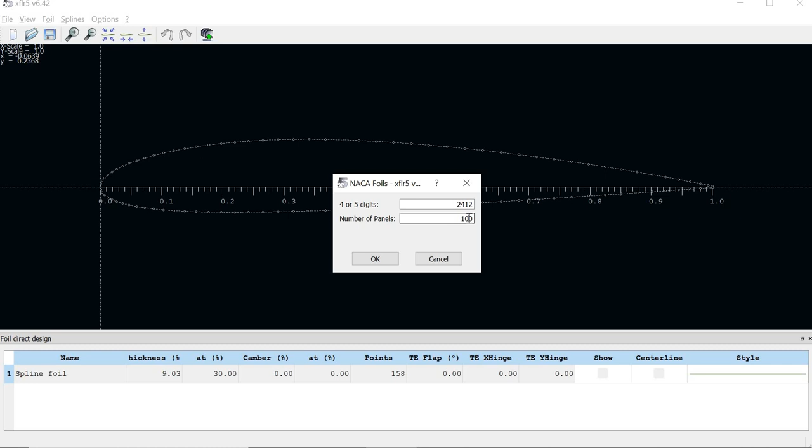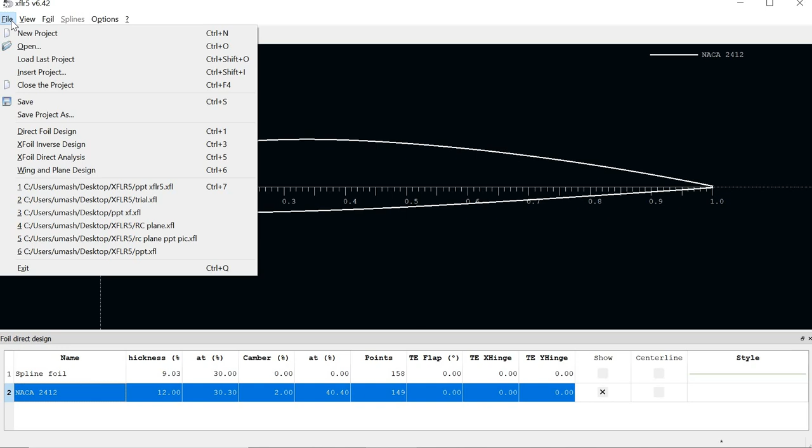So this is our airfoil. Here under style you can select points, style, width and color. Let us increase the width and change the color to white. Click on OK. So now let us do the analysis. File, XFoil Direct Analysis. So this is the graph.

Click on Analysis, Batch Analysis, Current foil only. Alpha minimum will be minus 10 degrees, maximum 20. Click on Analysis and wait. It's an iterative method which will be done for each and every Reynolds number.

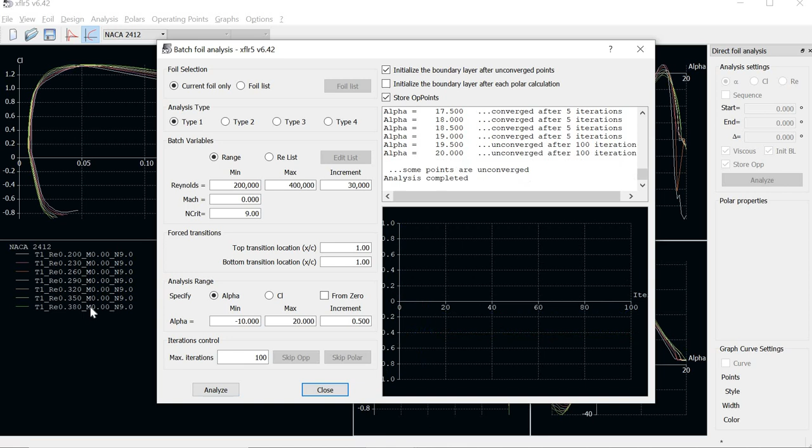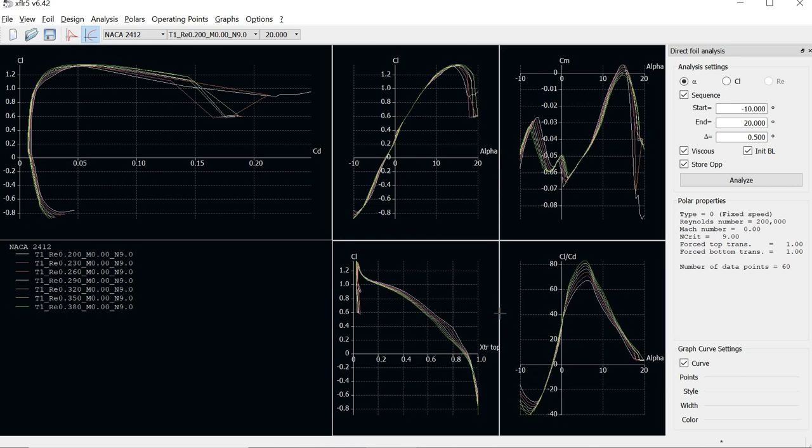Yes, and it's done. Close. So this is the graph that we will be getting. Now let us look into each and every graph. The first thing is CL versus CD graph.

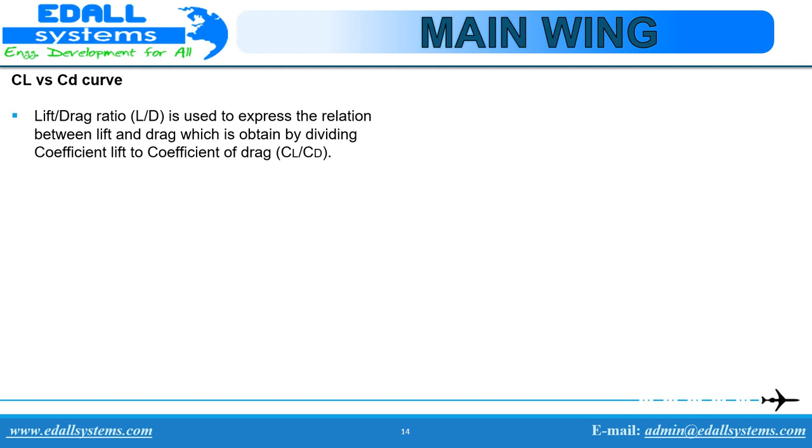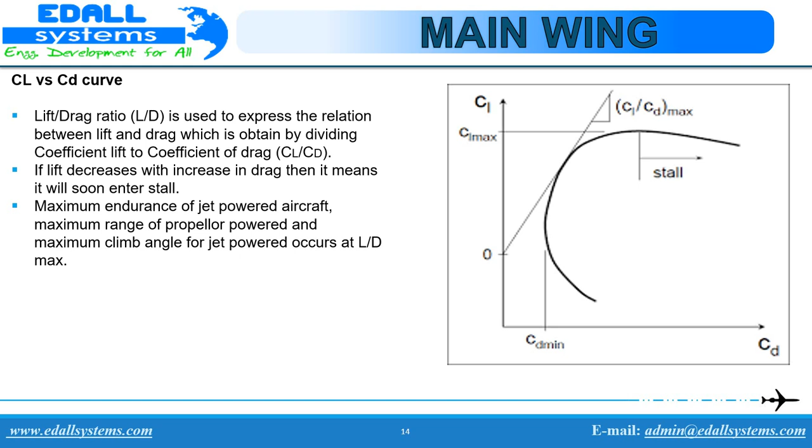The lift to drag ratio is used to express the relation between lift and drag and is determined by dividing the lift coefficient by the drag coefficient, that is CL by CD. If lift decreases with increase in drag, then it means that it will soon stall. Maximum endurance, maximum climb angle for jet powered and maximum range for propeller powered occurs at L by D max, that is lift to drag maximum.

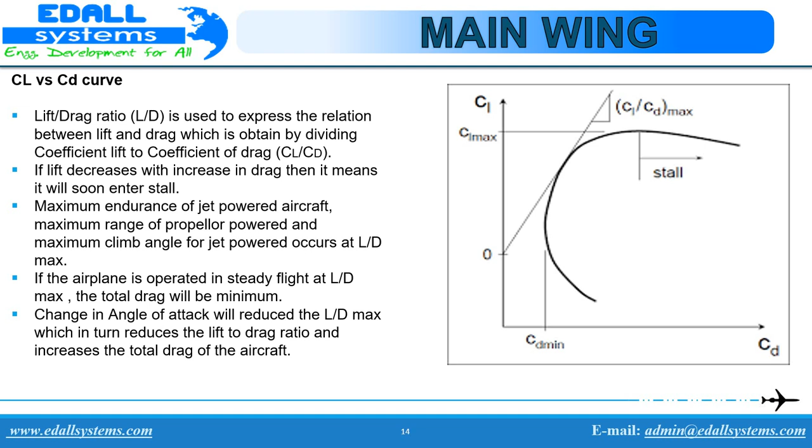If the airplane is operated in a steady flight at lift to drag maximum, the total drag will be minimum. The change in angle of attack will reduce the lift to drag maximum, which in turn reduces the lift to drag ratio and increases the total drag of the aircraft.

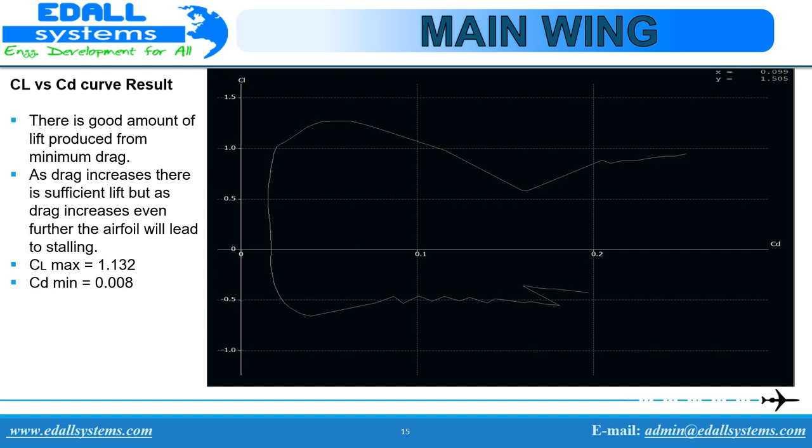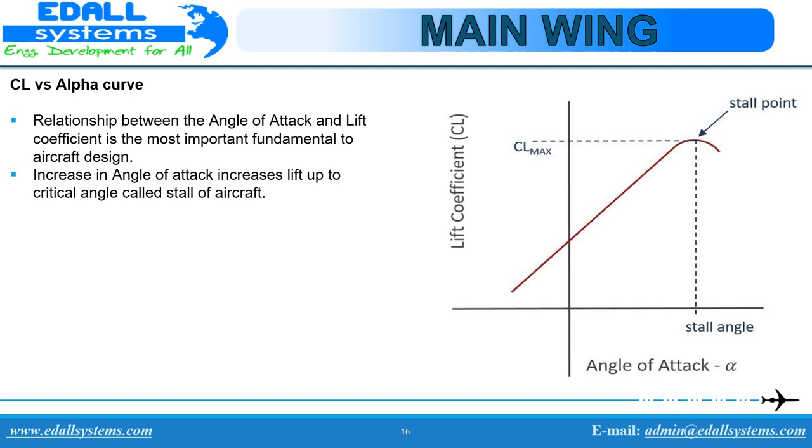The relation between the angle of attack and the lift coefficient is the most important fundamental to the aircraft design. Increase in angle of attack increases lift up to a critical angle called the stall of an aircraft. So here we have a normal flight and then the stall flight.

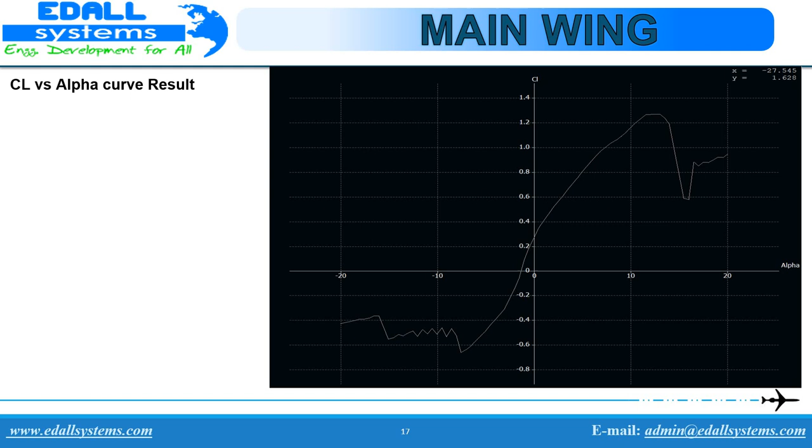The result that we have got for CL versus alpha is this, which shows there's a good amount of lift for less angle of attack. There is 0.34 amount of lift for 0 angle of attack. At 13 degree angle of attack, the lift produced is 1.34. At 15 degree angle of attack, the stall takes place.

So after stall, there's a slight increase in lift of the aircraft, which is caused due to the inclination effect of the aircraft, which is referred to as the fake lift, as once the aircraft is in complete stall, there is no lift or there is no true lift produced after that.

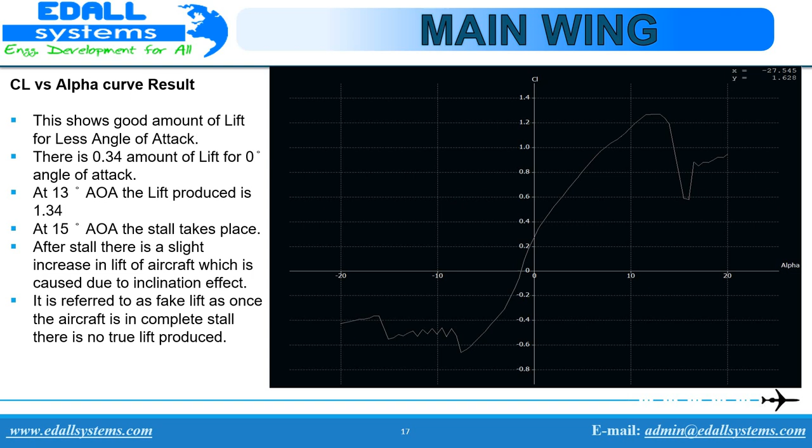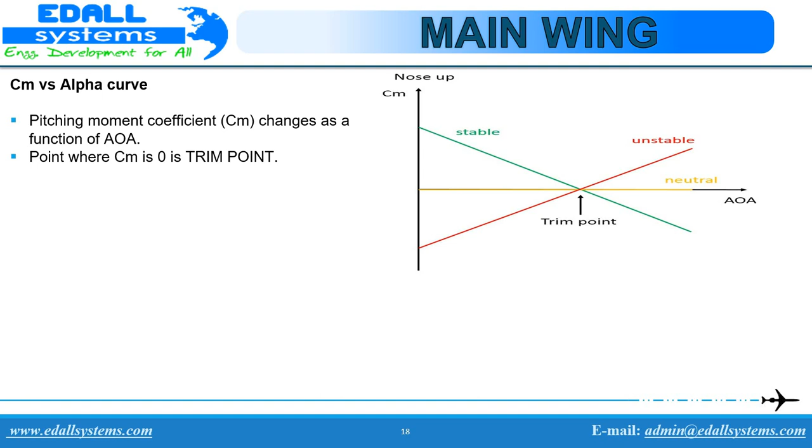Now we have the CM versus alpha curve. Pitching moment coefficient CM changes as a function of angle of attack. The point where CM is 0 is called the trim point. Pitching moment coefficient has to decrease in order to create a negative pitching moment. As long as the pitching moment coefficient slope is negative, the flight will be stable.

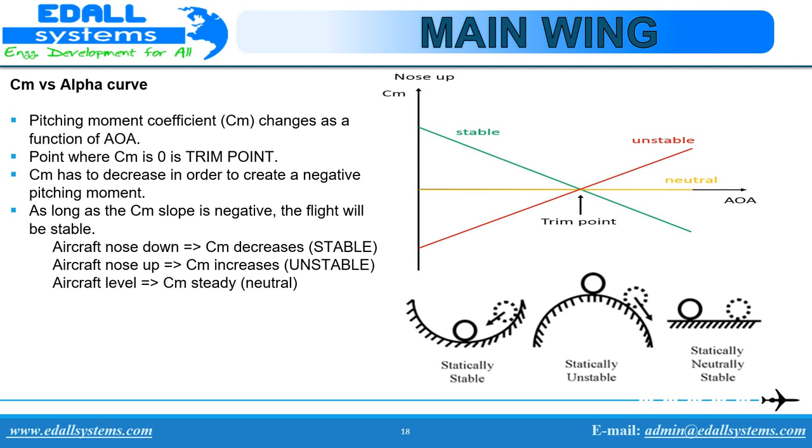So there are three types of stability, that is statically stable, statically unstable, and statically neutrally stable. If the aircraft nose is down, then the pitching moment coefficient decreases, that is called stable. If the aircraft nose is up, pitching moment coefficient increases, that is called unstable. And if the aircraft is level, then the pitching moment coefficient is neutral.

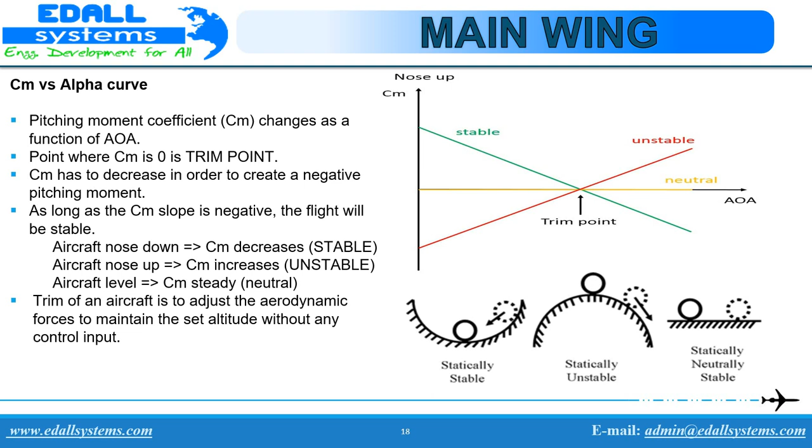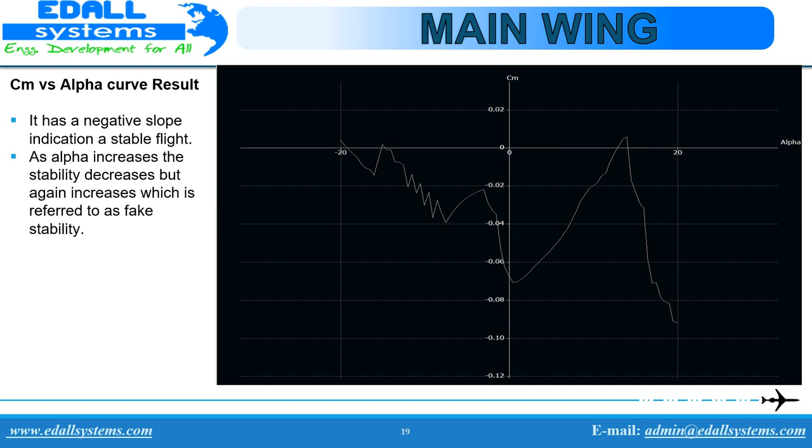Trim of an aircraft, when the pitching moment coefficient is 0, is to adjust the aerodynamic forces to maintain the set altitude without any control inputs. The CM versus alpha curve that we have got as a result is shown in the graph here. It has a negative slope, indicating a stable flight. As alpha increases, the stability also decreases but again increases later.

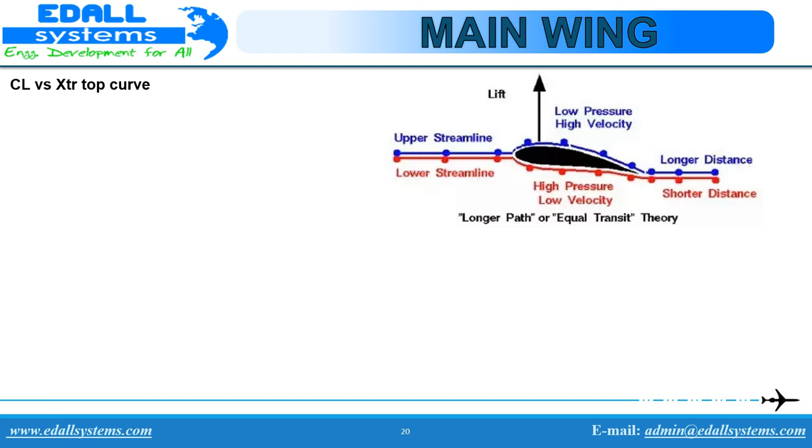Now we have the CL versus XTR top curve, the relationship between the coefficient of lift and the top surface of the airfoil. It indicates the lift coefficient obtained at different sections of the airfoil in the presence of skin friction drag. It describes how lift is distributed on the top surface of the airfoil at different sections of the wing.

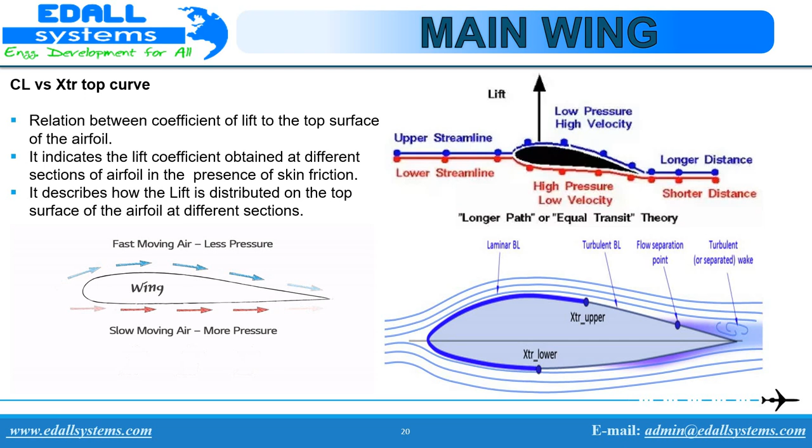The result that we have got for CL versus the top surface of the airfoil is shown in the graph here. The relationship of the coefficient of lift to the top surface of the airfoil indicates the lift coefficient obtained at different sections of the airfoil in the presence of skin friction drag.

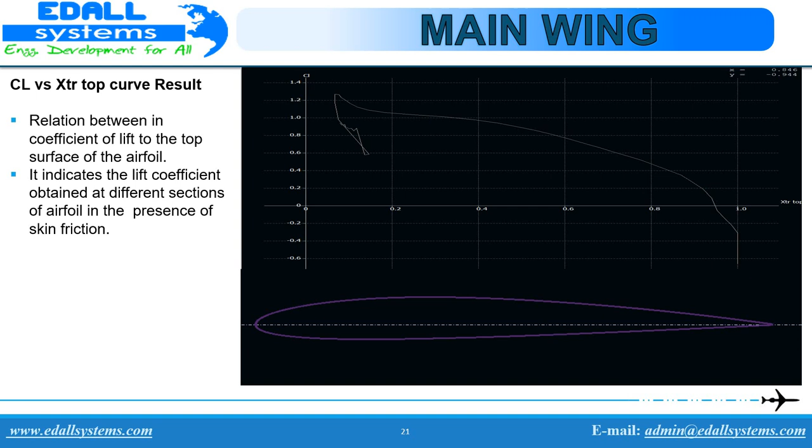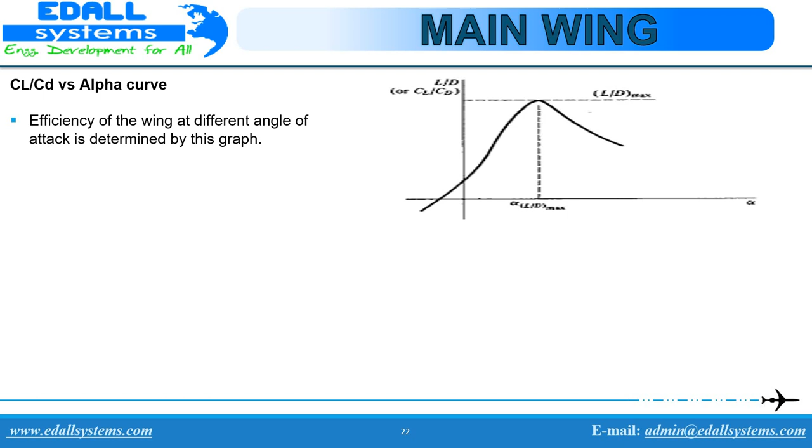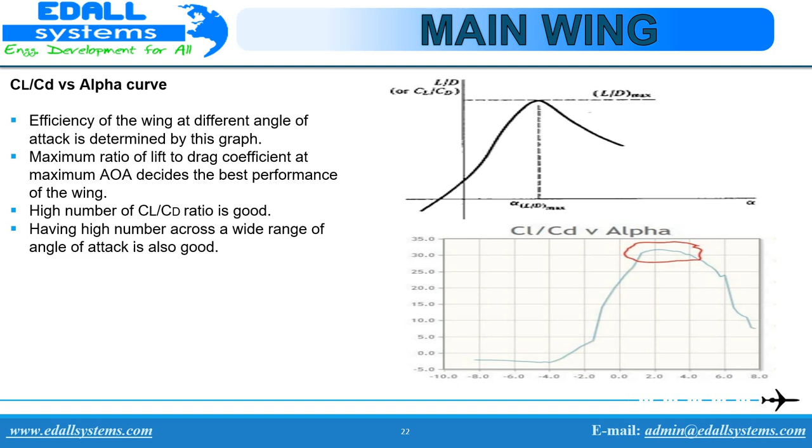Now we have the CL/CD versus alpha. The efficiency of the wing at different angles of attack is determined by this graph. Maximum ratio of lift to drag coefficient at maximum angle of attack decides the best performance of the wing. A high CL/CD ratio is good. Having a high number across a wide range of angles of attack is also good.

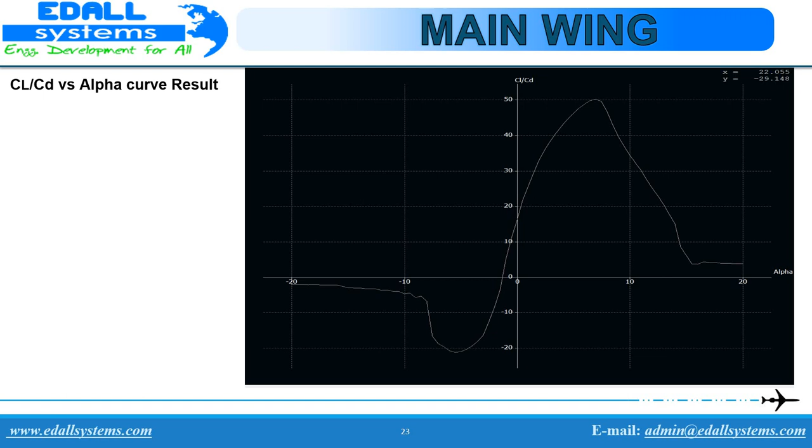So the CL/CD versus alpha curve that we have got is shown in the graph here. The peak performance occurs from 5 degree to 8 degree angle of attack. So if we are flying an aircraft with an angle of attack greater than 8 degrees, then it will be inefficient. The rate is declining from 7 degree angle of attack, which means the wing will stall and the aircraft will eventually crash.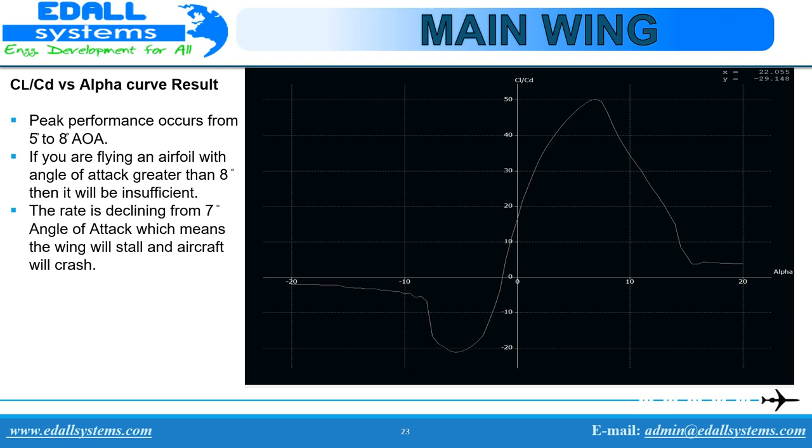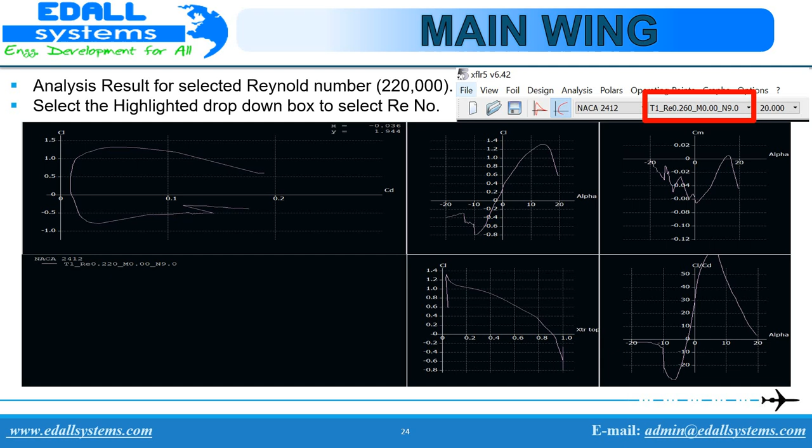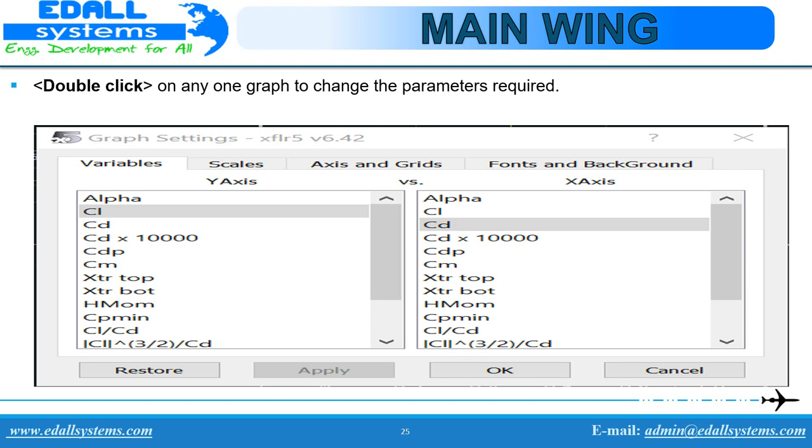Analysis result for selected Reynolds number. Select the highlighted box on the top right corner shown. When we select the different Reynolds number, we will get the graphs for a particular Reynolds number. By double-clicking on the graph, we can change its parameters to whatever variables we want on the X and Y axis. And then click on OK.

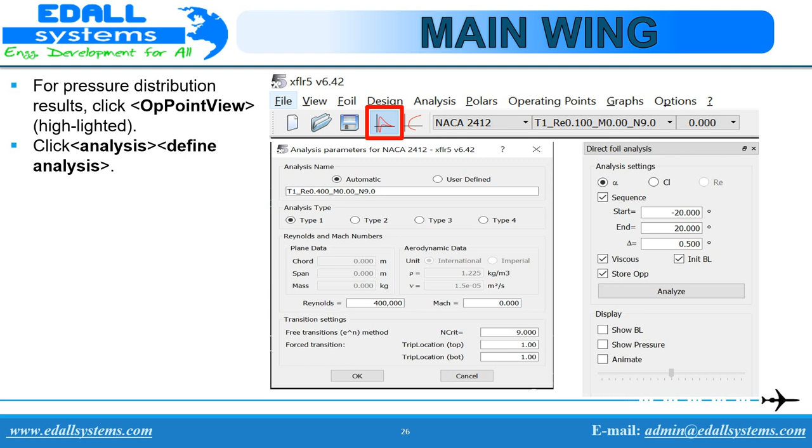For pressure distribution result, click on the OpPoint view highlighted on the right image. We will get the direct foil analysis. Click Analysis, Define Analysis, where we have Analysis Type 1, Reynolds number 400,000. Click OK. On the right side, select the angle of attack and select Analyze. The pressure distribution result for 0 angle of attack.

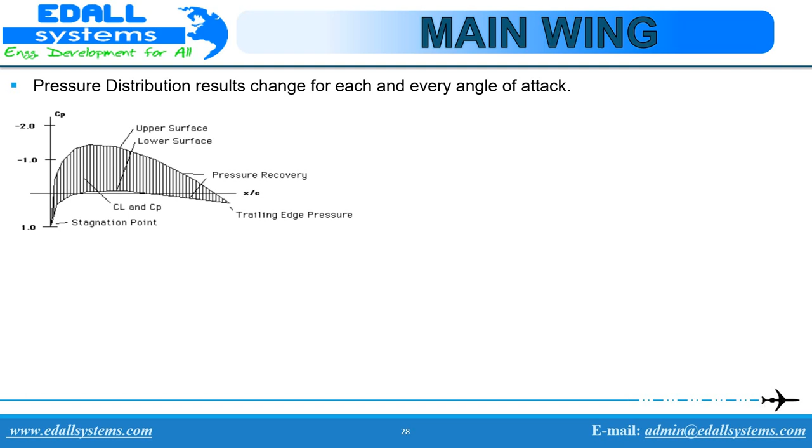By clicking on the highlighted drop-down box, the pressure distribution can be seen for different angles of attack. Pressure distribution results change for each and every angle of attack. As the airflow velocity increases along the surface of the wing, the pressure along the surface of the wing decreases.

Similarly, an increase in angle of attack will increase the separation between the airfoil's upper and lower sections' coefficient of pressure. In the same way that an aeroplane gets more lift as it increases its angle of attack, the NACA 2412 airfoil receives drastically more pressure loss as the angle of attack increases, producing a strong lifting force.

So the pressure differential created between the upper and the lower surface of the wing lifts the wing upward in the direction of lowered pressure. This lifting force is known as the induced lift. Let us see how to read the pressure distribution curve. The upper surface has a lower pressure, plotted higher as usual, than the lower surface.

The lower surface sometimes carries a positive pressure, but at many design conditions is usually pulling the wing downward. In this case, some suction that causes a negative coefficient of pressure, a downward force on the lower surface, is present near the midchord.

Pressure recovery is a region of the pressure distribution where the pressure increases from its minimum value to a value at the trailing edge. This area is also known as the region of adverse pressure gradient. As discussed in the other sessions, the adverse pressure gradient is associated with boundary layer transition and possibly separation if the gradient is too severe.

The trailing edge pressure is related to the airfoil thickness and the shape near the trailing edge. For thick airfoils, the pressure here is slightly positive. The velocity is a bit less than the free stream velocity. For infinitely thin sections, the coefficient of pressure is 0 at the trailing edge. Large positive values of coefficient of pressure at the trailing edge imply a more severe adverse pressure gradient.

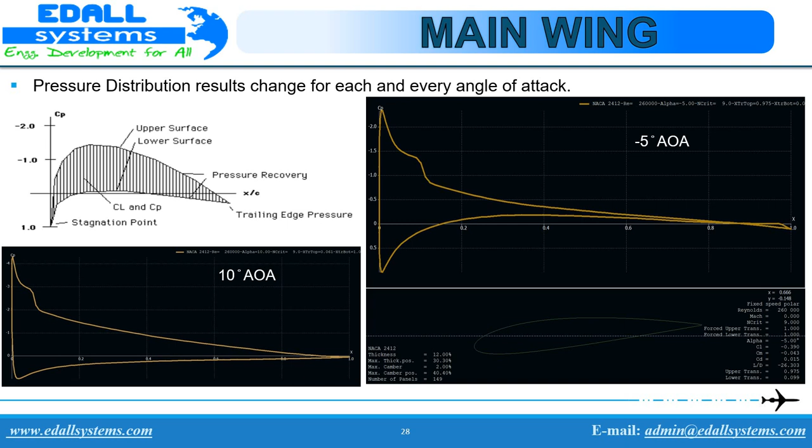Hopefully, you would have understood the designing and analysis of an airfoil. Let us move on to the wing design in the next session.